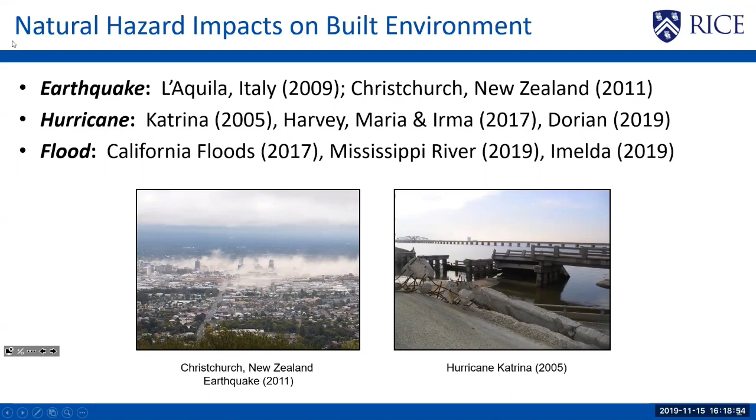I think it goes without saying that we can appreciate the potential impacts of a broad range of different natural hazards on our built environment, whether it be historic or recent earthquake events, hurricanes, or flooding events. This really serves to prompt and promote better understanding of not only the physical performance of individual infrastructures or networks of infrastructure systems, but also better exploring and modeling some of those cascading impacts on our communities.

I pulled a couple of different sources that I think did a nice job of helping to underscore some of the impacts of these hazard events on our built environment from different lenses. The first plot is some of the widely published data from NOAA, looking from about the time I was born until present day in terms of the number of billion-dollar disaster events. We note the increasing number of these events over those several decades, as well as some of the contributing hazards. This is looking at a US nationwide perspective.

I like some of the work from Pesaresi and colleagues that take a deeper look at trying to uncover some of the potential contributing factors with respect to looking globally at the exposure of either populations or area of development of our built environment. We see that continual uptick in some of those contributing worldwide threats with respect to earthquakes, flooding, or hurricane events, but also underscoring that with population growth and urbanization, we continue to be plagued with this challenge of mitigating the effects of natural hazards.

We'll dive down a little bit more deeply to look at one specific piece of that built environment today, which is transportation infrastructure. A lot of my examples today will be from bridge and roadway networks, where we spent particular effort trying to understand the individual components of these infrastructure systems. We'll also look today a little bit more broadly at how they translate into that system level performance or interaction with the community. I pull an example here because it hits close to home for me.

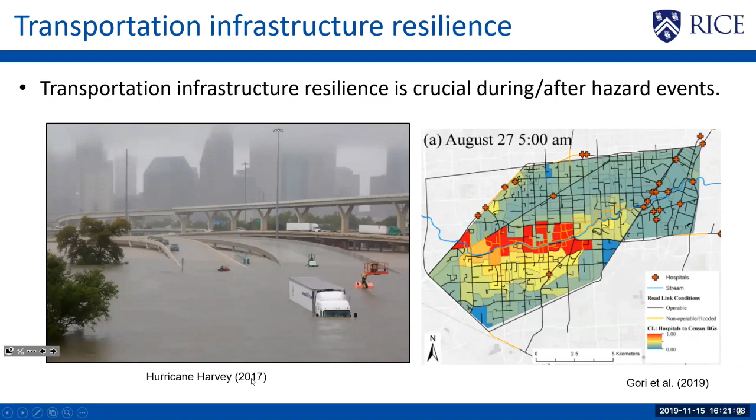These are images and maps from Hurricane Harvey that occurred in 2017. How many of you saw plenty of media reports about Hurricane Harvey out in the audience? Anyone live in or visit Houston during that time period in Texas? Some former Houston residents I know in the audience. This essentially was more or less in my backyard, so it always hits close to home when we're reminded of the potential effects that perhaps our work can have in trying to mitigate these events that affect our local communities as well.

We were reminded from this event when we're looking at perhaps roadway or bridge inundation or washout of structures of the short-term implications that can have on impairing emergency response operations, but also the long-term effects that can have in terms of repair and recovery of other systems or community functions.

We were also reminded from some of the work that we did following Hurricane Harvey of the inequitable impacts that hazards may have on different residents of our communities. The map on the right was some of our study hindcasting that Hurricane Harvey event, its impact on transportation infrastructure with respect to access to critical facilities like hospitals, but also looking at that intersection with different socially vulnerable populations or socio-demographic groups, where we saw very high correlation between loss of transportation access to emergency services and indicators of social vulnerability.

With that, we'll take a look at diving a bit deeper into better understanding and modeling transportation infrastructure performance and resilience following these types of hazard events. We'll touch briefly on some of the key input models to that framework, which has really been developed and evolving through a worldwide set of researchers. And I'll spend a bit more time looking at application examples, and we'll use those examples to point out recent advances and some continued challenges and opportunities before concluding today.

We're interested not only in that immediate post-event performance, but the time evolution as we seek to restore some metric of performance, whether it be load carrying capacity for a bridge or traffic throughput through a highway transportation network.

We see these notions of looking at pre-event planning, at absorbing these events, these punctuated hazards, and looking at that recovery timeline or adaptation over the infrastructure time horizon. So with that, I'll pose a very generic multi-hazard resilience framework.

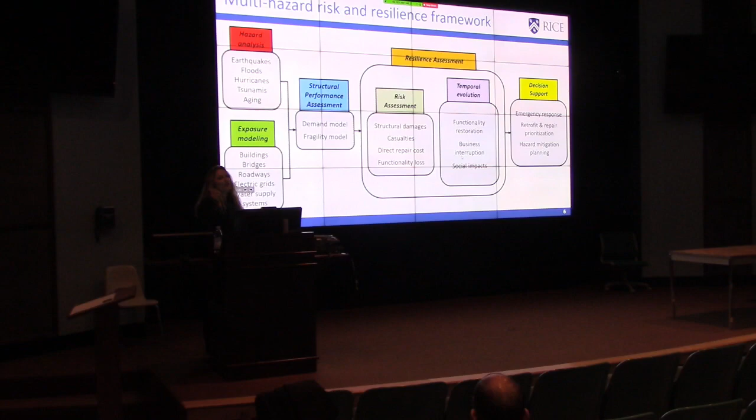Of course, key to this notion is that we have to have a healthy understanding of the hazard potential, whether it be earthquakes, hurricanes, floods, and so forth. We need to look at that exposure, like the early examples I showed of that worldwide exposure to populations or developed areas.

To be able to actually assess our infrastructure or structural performance, we need an adequate characterization of the spatial distribution of those structures, of their design details or other features, so that we can assess their behavior or response under these extreme event loads and their likelihood for entering some level of damage that we can correlate to metrics of performance, whether it be functionality or other cascading consequences like casualties or repair.

Keeping in mind our notion of resilience, we're interested not only in that immediate aftermath of the event, but looking at the temporal evolution of various metrics. These could be functionality of the individual system, but we're also seeing increasing notions of looking at the intersection between our built environment and other social and economic systems when quantifying community resilience.

A lot of what I'll be talking about today are some of the input models to this framework or examples of their integration, more from the analysis, modeling, and quantification perspective, but keeping in mind that our ultimate goal is ideally to support decision-making at various points in time in this resilience timeline.

It may be with respect to pre-event planning in terms of prioritizing resources for upgrade or investment of these systems. It may be in the immediate aftermath of these events, looking at emergency response and where we deploy crews, or maybe more of a long-term planning horizon that we're trying to affect in terms of hazard mitigation.

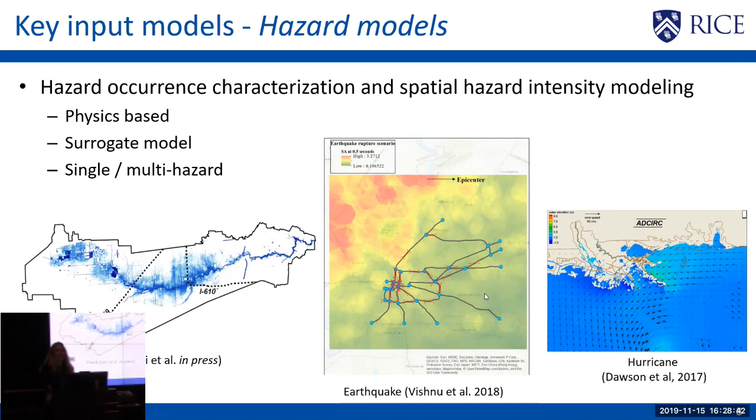And increasingly work that's looking not only at individual hazards, but multi-hazards from different perspectives, whether it be those cascading events like tsunami following earthquake, repeat events like repeated earthquake events or main shock aftershock simulations, or this idea of concurrent or correlated hazards, with that hurricane event being a prime example of the multi-hazard wind, surge, and wave event. Each of these pose challenges for us in terms of modeling and simulation, particularly in a probabilistic resilience quantification.

With respect to exposure modeling, I'll just point to some of the challenges and opportunities that I see here. A lot of the work that I'll show you today is looking at transportation infrastructure, and we do have some luxury of publicly available databases for some of these systems. But as we look at alternative systems, we're increasingly posed with challenges of understanding even the characteristics of those systems at a regional scale.

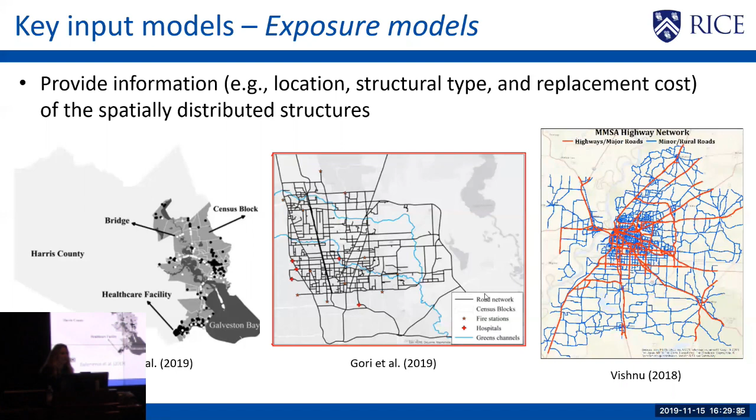We see increasing efforts at looking at proxies for different performance indicators or characteristics of the structure, and increasing efforts to be innovative in terms of how we define our inventory, whether it be leveraging AI from aerial imagery or boots on the ground data collection and synthesis.

In terms of characterizing the physical vulnerability of these infrastructure systems, here's where my group spends a large portion of their effort, is in terms of some of the fragility modeling of structural systems. The idea here is that we're characterizing the likelihood of damage to these structures or exceeding different limit states given some intensity measure of the hazard.

Or increasingly shifting towards not only the intensity measure of the hazard event, but also a set of characteristics that describe and define the structural system.

In this transition that Professor Bocchini mentioned, from structure-specific fragility modeling to portfolio level or class fragility modeling, we have a lot of decisions and compromises to make in terms of introducing additional sources of uncertainty into our fragility modeling and having adequate characterization of those systems.

We've seen increasing trends in recent years, including some of our work, to introduce the notion of parameterized fragility functions that help us transition from univariate fragility models, where damage is conditioned solely on intensity measure for a class of structures or an individual structure, to a compromise: a parameterized fragility model for a class.

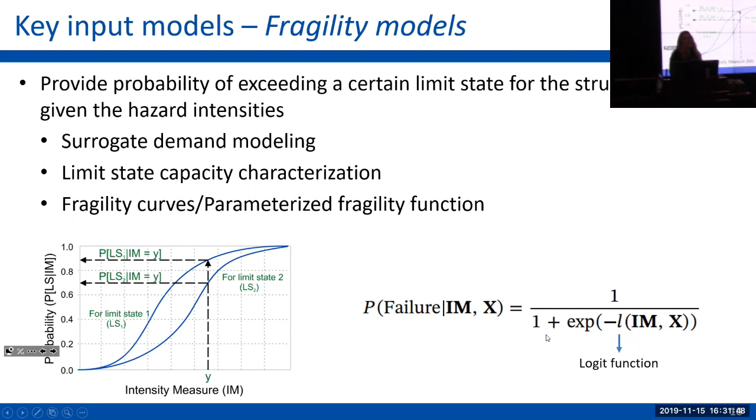Some advantages to this type of strategy would be that on a regional scale, we can have advantages in computational efficiency without deriving unique models for each individual structure, but still have the advantage of considering structure-specific details from our inventory, where we can propagate those uncertainties or introduce those design parameters from exposure information data.

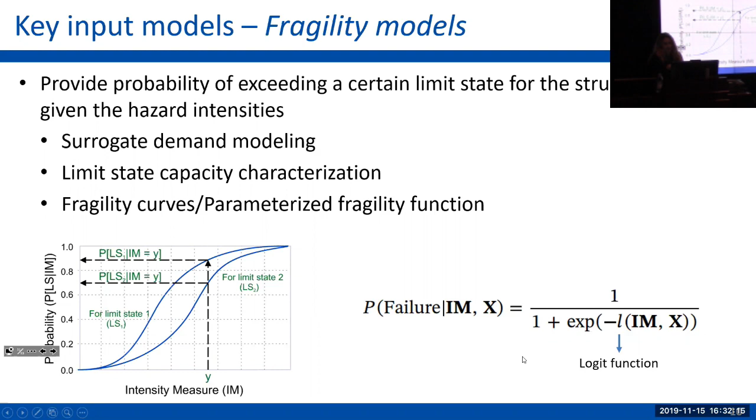I showed just one example form of that, derived based on a logistic regression, which is the form you'll see in a lot of the examples I show moving forward, but this certainly is not the only option for those parameterized models.

Very briefly, I wanted to highlight some of the range of different structural systems pertinent when we're looking at resilience of transportation infrastructure, with some former and recent advances here. The first one, shown top left, is a structural system that's received relatively limited attention in fragility modeling, especially at the class or portfolio scale.

If we wanted to look at resilience of railway networks, formerly we had very little information on the fragility of these structural systems. In many cases, we relied on their highway bridge counterparts as a proxy for railway bridge fragility. But that would have been an overestimation of the vulnerability of these systems if we don't consider the unique design details with rail-track interaction, for example.

This really serves to underscore, for those of you in the audience, that we still lack a lot of input models to this resilience assessment framework as we look to apply it to different types of infrastructure systems.

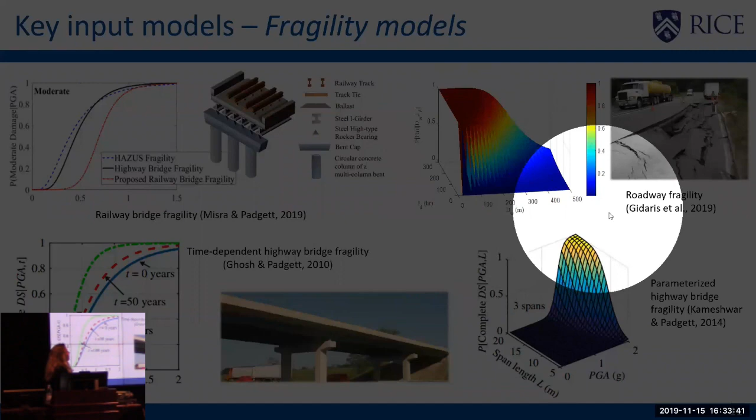On the right-hand side, an example of looking at another component of our transportation infrastructure with respect to roadway. We're looking at roadway under hurricane hazard loading, considering in this case a fragility surface where inundation duration is a key predictor of roadway washout, coupled with distance from the shoreline.

This is part of some of our ongoing collaborative work with researchers from the University of South Alabama, primarily informed by empirical damage data from Hurricane Ike.

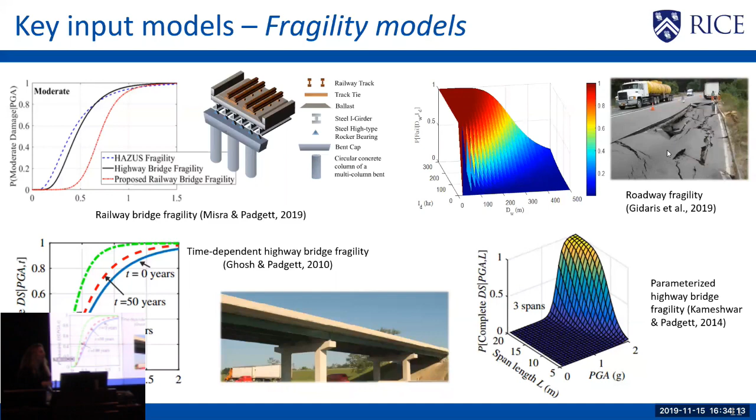On the bottom left, I'm pointing to some work we conducted about a decade ago, but I think this notion has really gained momentum and interest: looking at the joint intersection of different threats. Specifically, this example looks at effects of aging and deterioration of bridge infrastructure when assessing its performance under hazard loading, suggesting that we cannot simply look at that pristine structural condition when predicting its performance.

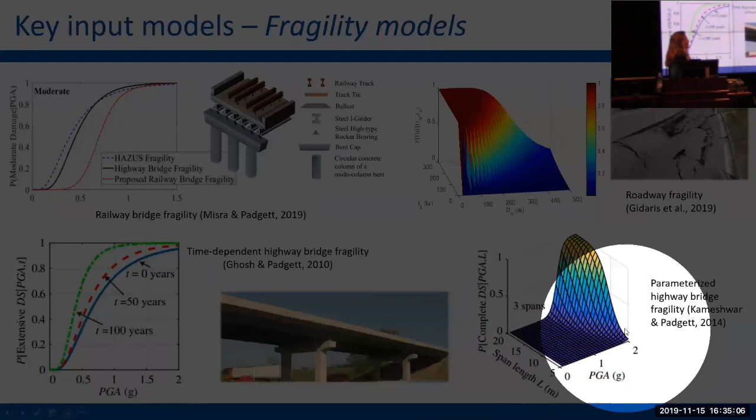Performance under hazards such as earthquakes. This is some work that Jay Ghosh did as part of his PhD work, which led to this notion of time-dependent fragility models for various structural systems.

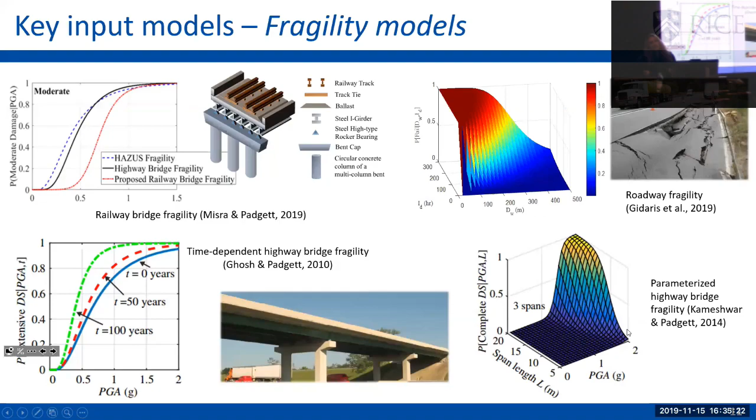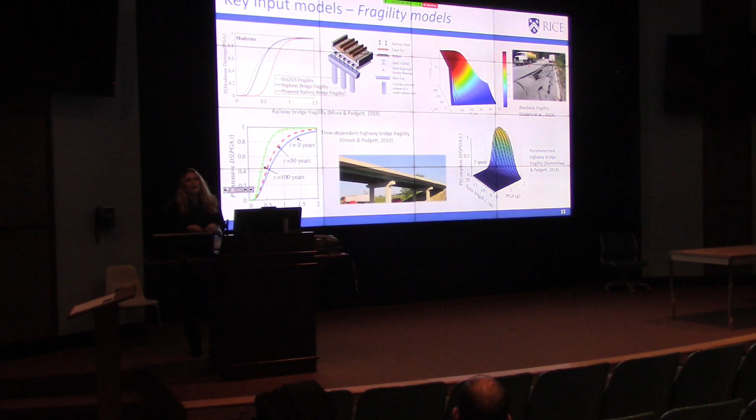And then finally, at the right, underscoring some of the parameterized fragility models for highway bridges that allow us the opportunity for what-if scenarios, looking at different design details. For an individual structure, exploring influences such as changing reinforcement ratio can be useful in the design phase, or at the portfolio level, looking at influences such as span length or number of spans so we can target and pinpoint some of the more vulnerable structures within our infrastructure network.

Finally, I want to point to another key input model that I think is quite a challenging problem: modeling the restoration, either at the individual structural system level or considering how those map to and integrate with the network level restoration of functionality.

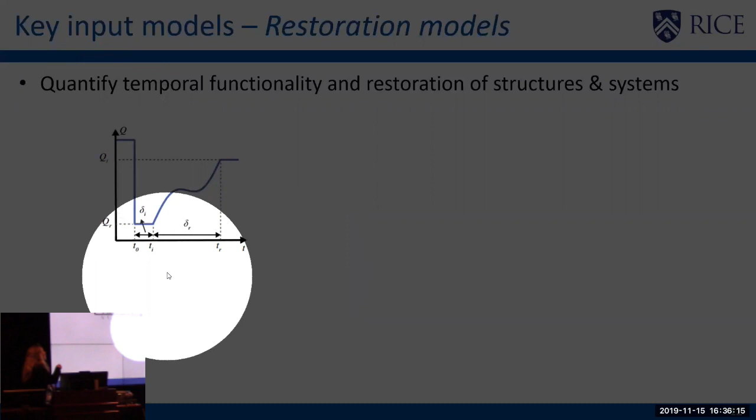So a fairly generic indication here that's been widely adopted by various researchers, including groups like Professor Bocchini's, to look at this idea of the time evolution of some metric of functionality Q over time, recognizing that we have some triggering hazard, some potential delay or time till initiation of recovery, and then that time evolution of restoration of functionality.

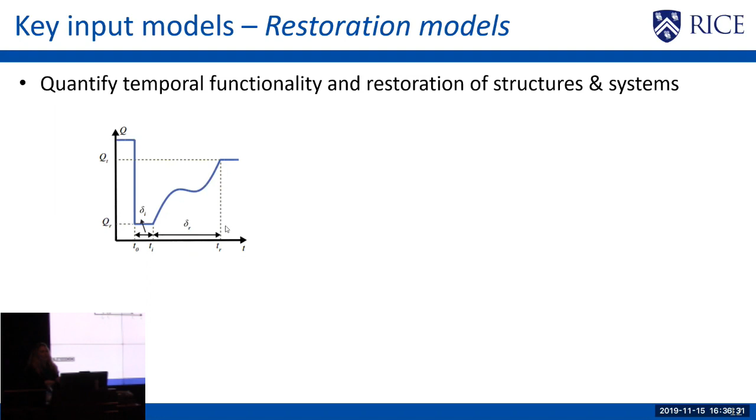Not a trivial thing to try to model from an objective perspective. I'll note that within the transportation infrastructure realm, there's been quite a bit of work that has attempted to look at this, especially for bridge infrastructure, looking at some early stepwise restoration functions just for the immediate aftermath of the event, to work that's looked at that full time evolution of recovery or explored different model forms that could be introduced to characterize that recovery.

A real challenge with developing these models is the need for data to either inform or train them. One approach we've taken is to leverage survey data of owners, inspectors, and contractors who would perform either the post-event inspection or model that restoration timeline, considering repair actions, and also collecting post-event damage and recovery information on time to repair.

This is one potential approach where we have looked at decision tree models informed by survey and empirical data, giving insights based on the combination of component damages to this system: the likelihood of closure to the bridge immediately after the earthquake, or imposing load, lane, or speed restrictions. This is particularly important if we want to link bridge infrastructure damage to transportation infrastructure performance, characterized in terms of metrics that tie to traffic flow or lane load and speed restrictions.

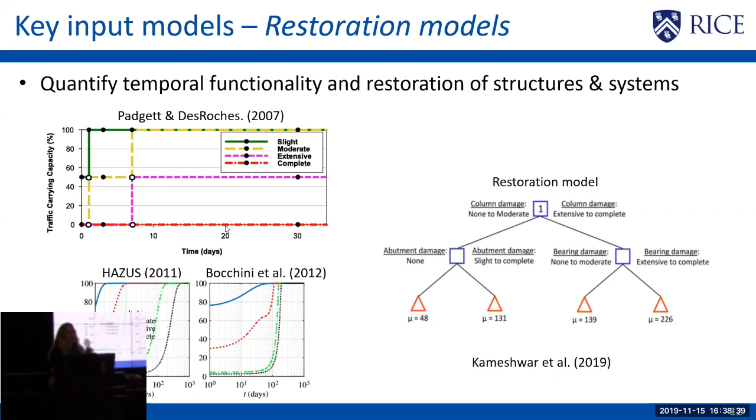An additional consideration is not only the immediate aftermath of the event, but looking at that repair timeline and evaluating the time to either fully open the structure or remove some of these restrictions. With that in mind, I want to move to a few application examples that highlight advances and challenges in this area.

The first example is an evaluation of resilience to seismic hazards for a transportation bridge and roadway system, where we look not only at classical metrics of resilience, but broaden that notion to other metrics of performance. We'll leverage a test bed in the greater Memphis area, which I refer to as MMSA, the Memphis Metropolitan Statistical Area, or zoom in to a specific Shelby County example in the region.

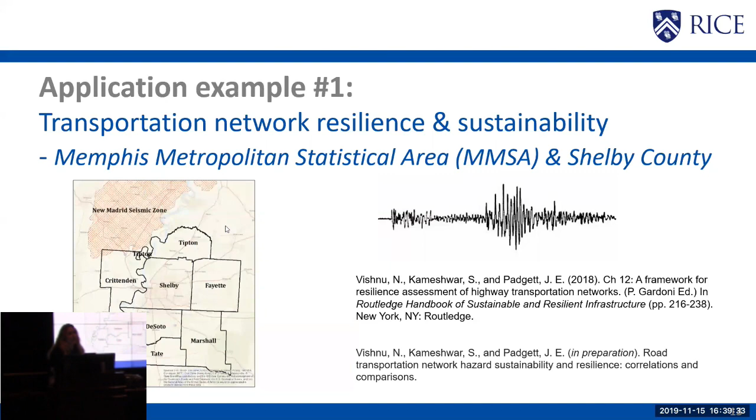This specific location is part of an ongoing test bed as part of the NIST Center of Excellence on Community Resilience Planning. Of course, one of our challenges is to first define that infrastructure system in terms of its exposure, the characteristics of the bridge and roadway system. I won't go into the details of all the data collection, but just an illustration of the type of network we're dealing with here.

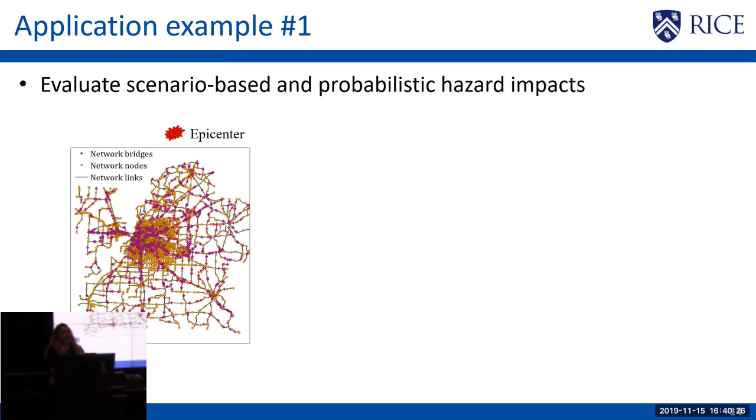We're looking at both scenario-based and probabilistic hazard analysis for this case study. I'll show you one example of a scenario earthquake event near the New Madrid seismic zone, where we're integrating some of those parameterized seismic bridge fragility models mentioned earlier, and also the decision tree-based restoration functions for looking at that time evolution of component restoration of functionality.

Here's one example where we compare pre-event transportation network performance in terms of traffic flow through the network, implying that we're coupling this with a flow-based analysis. From our perspective, we are not transportation engineers—we're using what I'll call state of practice user equilibrium traffic flow simulation through this network to look at things like the number of vehicles flowing through these links.

To inform this, we need information on key origins and destinations in our system, essentially where drivers tend to go. Integrating those input models from the fragility and restoration functions, we can better understand the post-event condition, not only immediately after the event—seen here with color-coded closed bridges marked by red X's, partially open structures with lane or load restrictions, or fully open structures—but also explore how that evolves over time, both at the component level and in how it affects transportation network performance with traffic flow through the system.

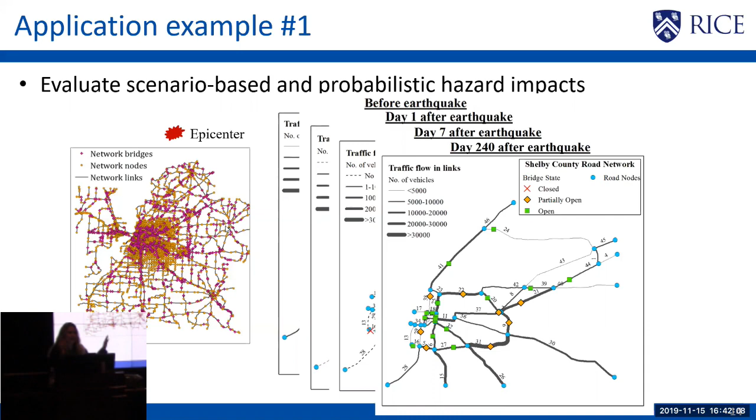In this example, by about 8 months after the event, although we still have some partially open structures, we have nearly resumed our initial traffic flow in the system. So that's one way of measuring the time evolution of performance of that system.

But I think this is really an ongoing discussion that we need to continue to have with respect to these types of resilience metrics, or ways that we may measure and communicate functionality of these systems. And it may be very different for different decision makers or stakeholders.

From the perspective of transportation infrastructure, we often look at things like connectivity between different locations, say from a household to a fire station, or metrics such as travel time or travel distance that are often tied to indirect consequences on the community. We can broaden that notion to not look in isolation at the transportation system, but its intersection with social or economic systems, looking at other metrics of performance over time.

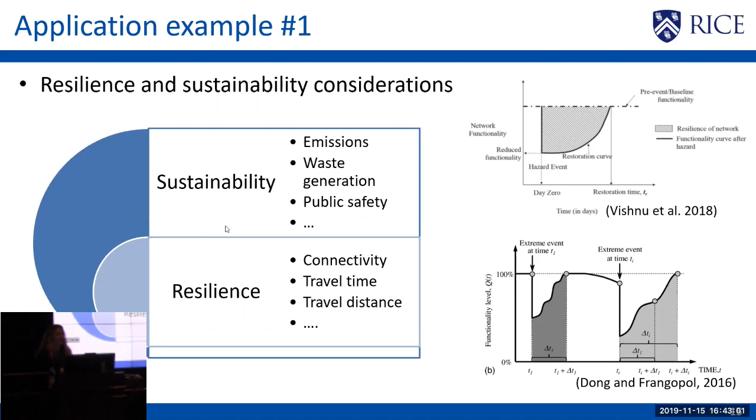I think this starts to have a lot of interplay with discussions surrounding sustainability of our systems, and perhaps looking at hazard performance through that lens of sustainability, where we measure things like the waste generated from damaging, repairing, rerouting within the system, or the emissions and embodied energy associated with those repair or rerouting actions. These may be other, perhaps broader resilience metrics that we consider through the sustainability lens.

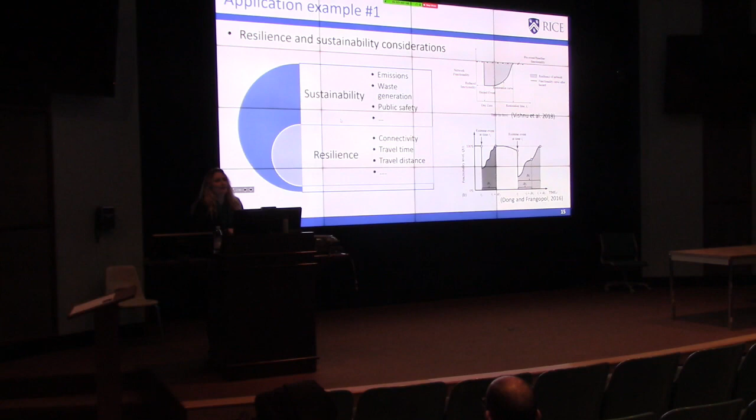There are also a lot of different suggestions in the literature with which we might quantify these individual metrics of time evolution, considering integration above or below the restoration timeline, and work like that from Frangopol's group here at Lehigh that suggested we need to be transitioning to looking towards life cycle measures of resilience with the potential for multiple or repeat hazard events. So all of these, I think, are worthy discussions as we continue this pursuit.

One thing that I want to put out there is perhaps the need to better offer guidelines on the resolution of some of these types of models when we're answering different questions or measuring different levels of performance. For example, with that same MMSA network, we looked at various measures of performance such as travel time, travel distance, emissions, or missed trips. As we look at different resolutions of our transportation network, it can have a very significant impact on the measurement.

Of these resilience metrics. I also think that points towards the fact that we should perhaps be more interested in relative comparisons of some of these measures at this stage, rather than some of those absolute estimations of either deterministic or probabilistic metrics of resilience.

Lastly, I want to point to some of the opportunities this can pose in terms of looking at, perhaps at a system level, identifying what are our dominant contributors to these measures. So if we're looking at emissions over the transportation network, which key vulnerable bridges, the damage of which structures, are contributing most to the emissions we see. This could be a way to help target pre-event investment in retrofit or upgrade, depending upon what your metric of interest may be. It doesn't have to be emissions.

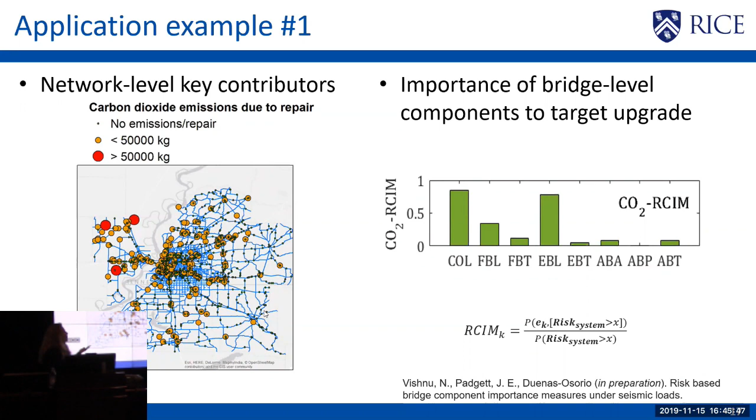The other way we can look at this may be at the structural system level. This is just an example of some work we've been doing in collaboration with my colleague at Rice, Leonardo Duenas-Osorio, looking at risk-based component importance measures, where we essentially identify which bridge components, whether it be the columns, the bearings, or the abutments, are responsible or tied to us exceeding various risk thresholds.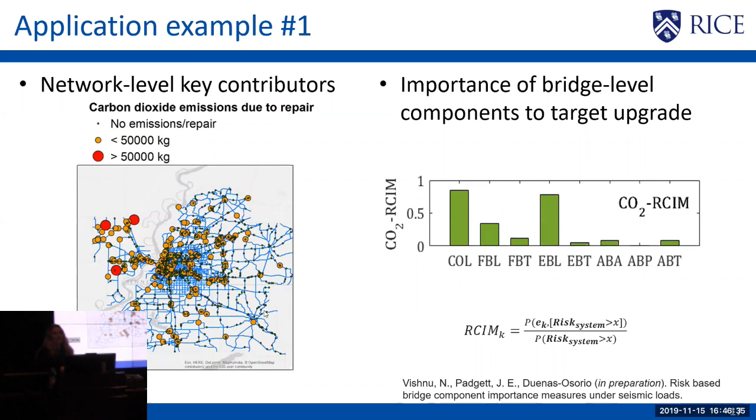This may be target risk thresholds with respect to cost, emissions, travel time, however you want to define that risk performance measure. But it helps us perhaps to have a transition from our traditional reliability-based component importance measures to looking more broadly at social, environmental, or economic implications of these structural systems.

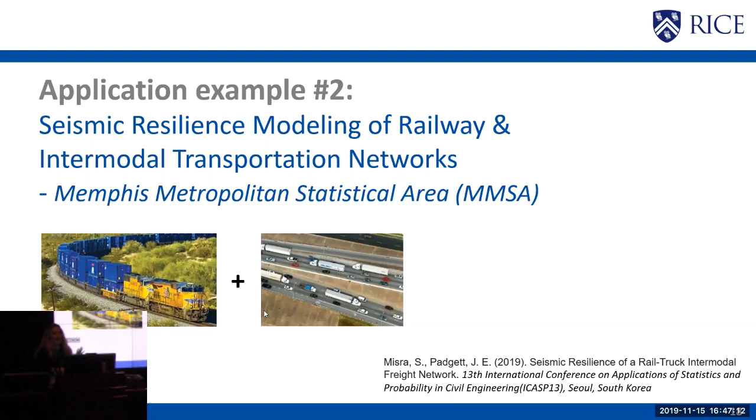With that, I want to transition to an application example that moves us beyond individual modes of transportation, like our bridge and highway network, that I think has received a little more attention in the resilience modeling community, to looking at railway systems and this idea of intermodal resilience of networks, where we consider the potential for transport of goods or freight across these different systems. We're again using that same MMSA testbed around the Memphis metropolitan area.

So some of the ongoing work of one of my students, Sushreyo Misra, is looking at defining a probabilistic resilience framework for rail and truck intermodal systems under seismic hazards, essentially considering the potential for freight flow across these two systems. There's been quite a bit of work from more of the operations and logistics perspective of looking at resilience of these intermodal systems, but we find that we're lacking a lot of the key input models in order to adequately assess the performance of either the individual or the combined systems.

I showed you the example of the railway bridge fragilities or some of those restoration functions that we're deriving not only for bridges, but also rails and roadways that inform this type of modeling.

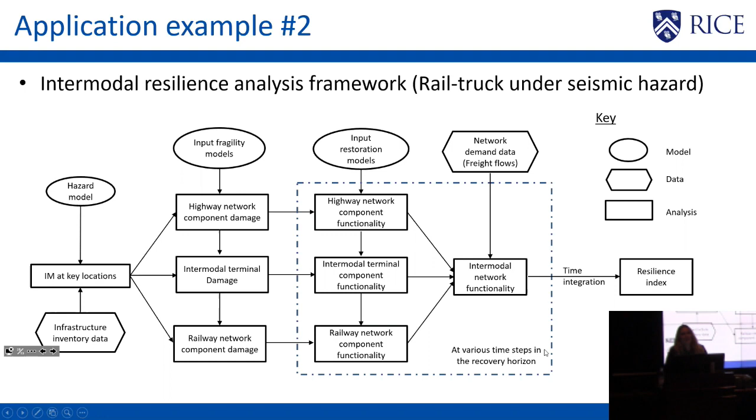Some of our ongoing work is looking at what I think is an interesting challenge in these intermodal networks, which is not only the railway network or the highway network alone, but where they come together for goods transfer. This is essentially a complex system in and of itself with respect to the terminals. We have cranes, we have the potential for warehouses, we have other systems such as fuel that are important for that freight flow transport. Each of those have their own constituent structural systems and functionality that are required for informing the intermodal network functionality.

I'll show just a few examples of that MMSA system in terms of the range of different metrics we may be interested in. It could be things like cost to the shipper—perhaps one of the dominant metrics important for determining if the shipment will be taken. We could look at indirect effects such as cost to the environment or the potential for accidents, or freight flow value that's disrupted. This is perhaps one of the most direct links with some of our colleagues looking at economic impacts at a regional or nationwide scale.

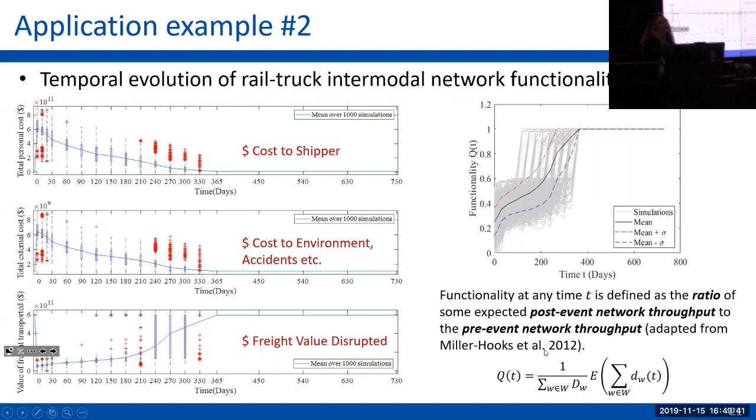An illustration on the right is showing an adaptation of a functionality metric that was proposed by Miller Hooks, where we're essentially adapting that to look at the time evolution of post-event to pre-event throughput in that intermodal network, which is shown in the figure at the top.

So what are some of the implications of these types of models? One thing it's pushed forward for us is the importance of looking not only at multi-resolution but multi-scale analysis, especially when we're talking about things such as freight flow, where we don't have these perfect boundary conditions around, say, Shelby County or the MMSA case study network, but there is the potential for local damage to affect that nationwide freight flow. That's led us to look at high resolution models with all of those individual components like the intermodal stations in our local region, but coarser models across the nation for flow of goods that could be rerouted around our affected regions.

It's also allowed us to have better opportunity for coupling with some of our colleagues that are looking at these regional or nationwide CGE models of economic impacts.

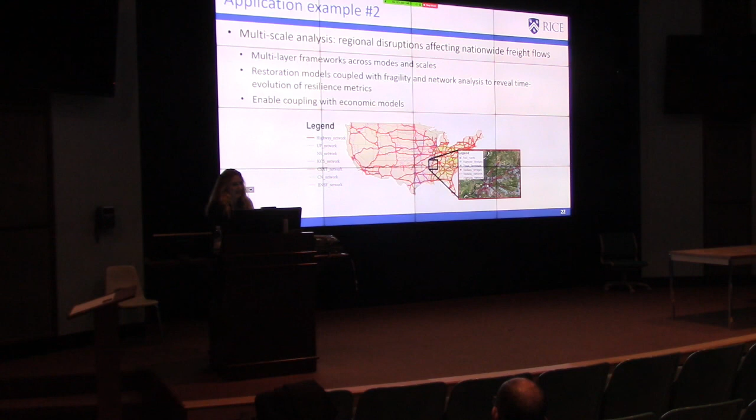With that, I want to take a bit of a shift down the coast. We've been looking up in earthquake country in the central and southeastern US, and I want to use a couple of final examples that are closer to home for me. We're shifting towards the Texas coast.

So now in this multi-hazard context, we're considering the potential for hurricane events and their impacts on our transportation infrastructure. But in this example, I want to shift to looking at not only the impacts of, say, bridge and roadway damage on the transportation network performance, but how we might link that with other systems such as petrochemical facilities or refineries that have their own models to characterize their performance.

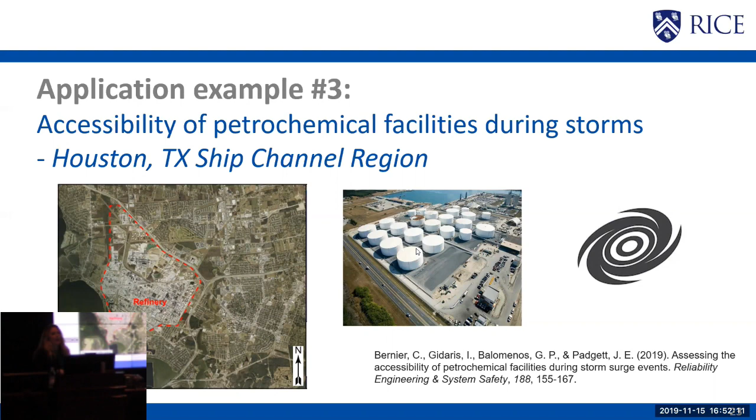So we'll be looking at this idea of performance of components within a refinery along a coastal region, in particular the potential for damage and spill risk to above ground storage tanks in these refineries. One of the key questions we're trying to answer is, can we actually access these high spill potential locations quickly during or after a storm? And also, what are the broader implications perhaps for things like human resourcing or staffing? Can workers get back to resume business operations or for intervention activities?

Generally, you see our integrated framework and some of the key inputs. We spent quite a bit of effort developing some of these tank vulnerability models in recent years, and we'll be integrating some of the bridge fragility models for looking at unseating potential from hurricane coupled surge and wave action. In these examples, we're using scenario storm simulations that I'll be showing you, with the potential to extend that to more of a fully probabilistic hazard analysis.

Some of our key questions, again, would be looking at whether we can reach these high spill risk locations, because not only of the potential for bridge damage, like the unseating case, but that time evolution of inundation of bridge and roadway that affects short-term functionality as well.

In terms of some of those input models, we spent a lot of effort developing some of the exposure or inventory data, processing aerial imagery, as well as relying on permit information, publicly available databases, reverse engineering the design of some of these structures. So it doesn't perhaps always get a lot of appreciation, but there's a lot of effort that goes into building these types of case studies.

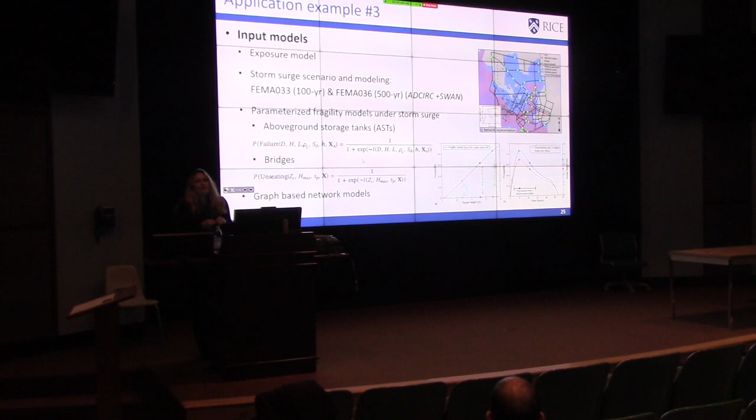The two different scenario storm events we're considering are based on work done by the U.S. Army Corps of Engineers with coupled ADCIRC and SWAN models, essentially high fidelity simulations of surge and wave potential. We're integrating parameterized fragility models that predict the potential for tank damage, including failure from uplift, shifting, or overturning of these tanks that may lead to spillage of hazardous materials like crude oil.

From the perspective of bridge vulnerability modeling, we're considering parameterized fragilities where unseating is predicted based on characteristics such as maximum wave height or relative surge elevation.

The illustrations on the right underscore the time series we're considering. I'm focused on a relatively short time horizon in this example, looking at the full time evolution of the storm passage - not only the surge time history, but also the time evolution of failure probability of those tanks, which may lead to spill risk during the storm event.

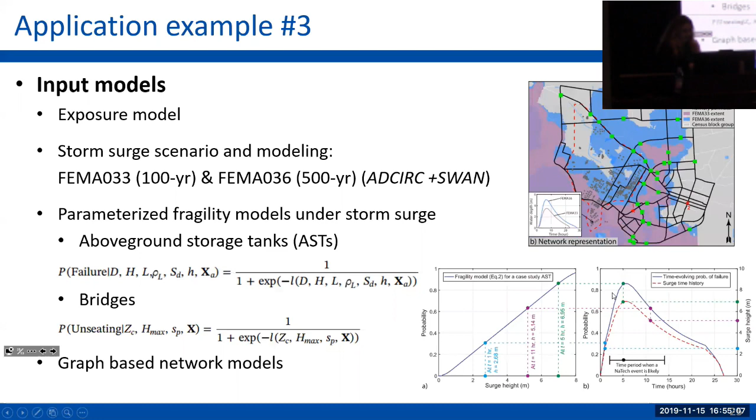That's where we want to focus on whether we can access these high spill risk locations, considering we may have the potential for removing nodes or links in our transportation network because either the bridge is unseated, the road is washed out, or we have inundation of those assets. We'll look at different metrics such as connectivity loss, travel time, or travel distance.

We use that to look at things such as increased travel time from emergency services to the high spill risk locations, or the time evolution of census block access back to the refineries.

This can have key implications from an owner or operator perspective. Often there are definitions requiring those involved in resuming business continuity or emergency response to live within a certain radius of the facility. But that may not be the best approach from a risk-based perspective, looking at the likelihood of actually being able to reach the facility from home. You may be very close to the facility but have very low potential of actually getting back to help with cleanup or resuming operations.

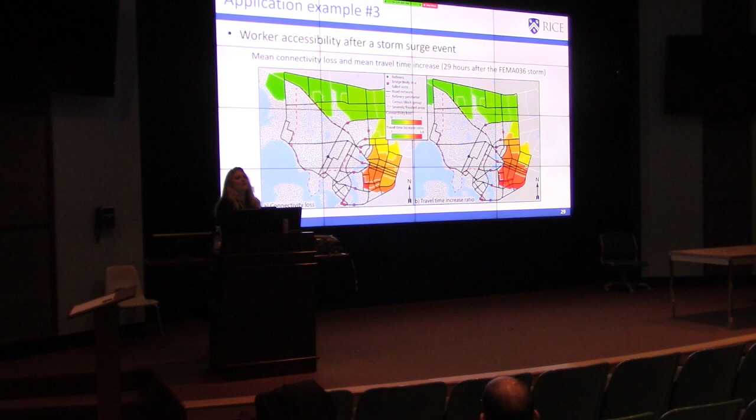So that's one other perspective on how transportation infrastructure resilience can inform various stakeholder decisions.

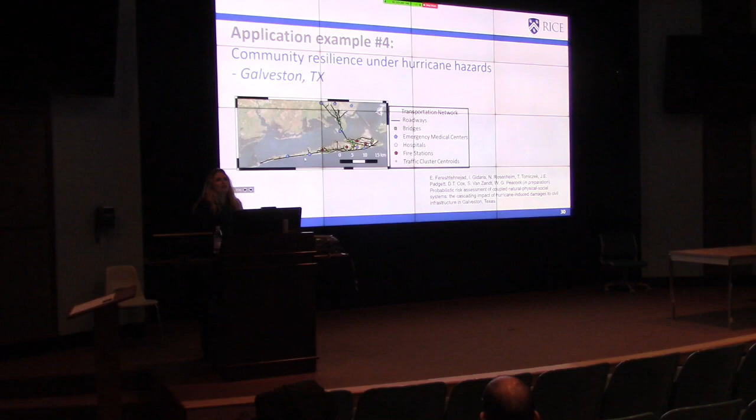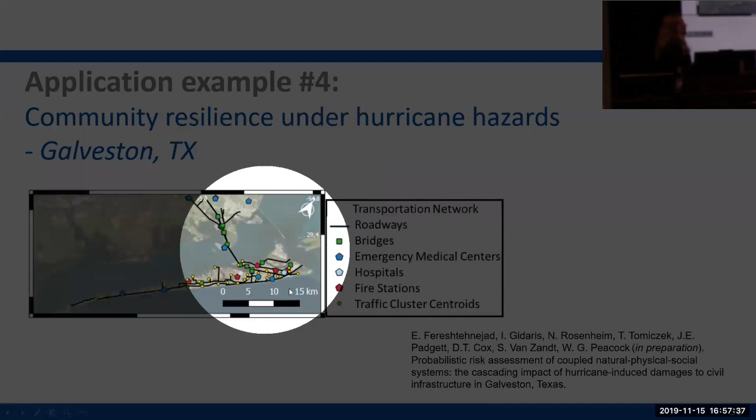I want to leave you with this last application example, integrating transportation resilience models into a broader assessment of community resilience under hurricane hazards. This is part of a large collaborative effort with colleagues from Texas A&M social sciences, Oregon State University, and the U.S. Naval Academy. In this example, we're looking not only at bridge and transportation infrastructure, but the potential for building damage from these multi-hazard surge, wind, and wave events.

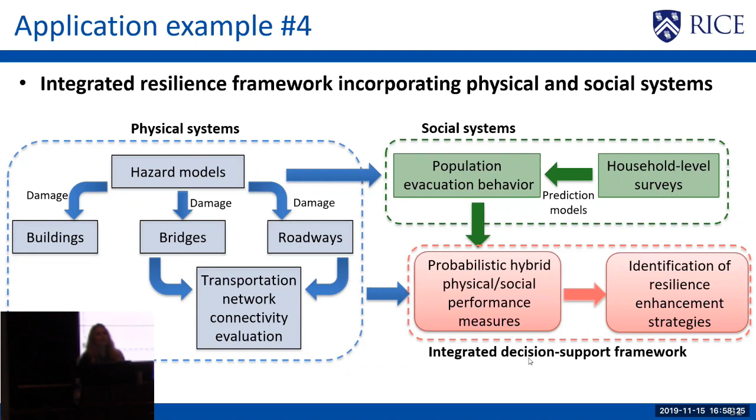We're coupling that with social systems models characterizing household-level sociodemographic information for the community, using it to inform models such as the likelihood of evacuating prior to a storm event. We use this to compute what we refer to as hybrid metrics of resilience, implying that we require this coupling between social and physical systems to even evaluate some of these metrics to inform decision making.

In terms of hazard modeling for this case study, we're transitioning from the scenario storm events I showed previously to the potential for fully probabilistic hazard simulation. We're achieving that by leveraging surrogate models of storm intensity measures using Kriging surrogate models. This follows generally the approach proposed by Taflanidis and colleagues, but extends it to look at other metrics such as inundation duration, which we find is a key predictor of things like roadway washout, as well as joint surge and wave intensity measures at the site.

Key predictors of this model include the angle of approach, landfall location, or radius to maximum winds. The advantage is we can very efficiently approximate these intensity measures and afford hundreds or thousands of realizations of the storm at the site of our building, bridge, or roadway infrastructure.

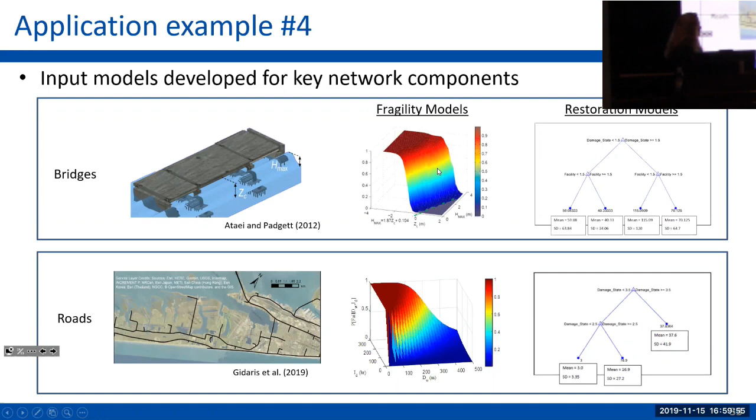These are some of those hurricane fragility models that I mentioned earlier, where we're predicting unseating potential given relative surge and maximum wave height. And then again, looking at the potential time evolution of restoration of functionality of these structures, as well as roadway washout based on some of those recent empirical roadway fragilities.

In this example, we're moving beyond some of our simplifications from the earlier studies and considering that we perhaps don't have perfect availability to crews and resources to conduct repairs of these structures. So now we're looking at constraints on crews and how we deploy them. We may have optimistic assumptions with respect to prioritizing crews based on their importance in the transportation infrastructure, or we may look at a system where we're lacking that knowledge from an objective perspective.

So this is just one example of looking at operability in terms of the fractions of different origins and destinations that we can reach, but considering the fact that we have constraints on crew availability, with the more optimistic assumption that at least those resources are deployed based on priority in the transportation network.

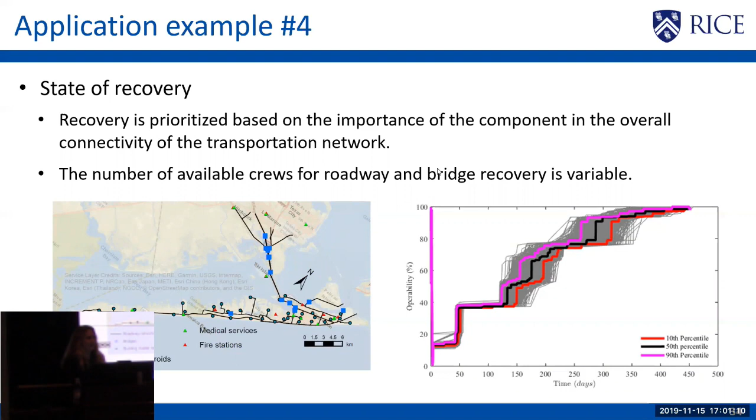With that, we can look at measures such as connectivity between various households to inland off of Galveston Island, or look at things like access to fire stations or medical centers.

We have the potential for looking at this now at the household level as well, and integrate things like the potential damage to the residential structure, as well as the access to that structure, and whether we are likely to have someone still inside, a non-evacuee.

This is what we're referring to as hot households, which is essentially a worst case: you're in a vulnerable structure that's likely to be damaged, you haven't evacuated, and you can't be reached by fire or emergency services. This could be a great way to target either communication strategies, support for evacuation, or where we may invest in pre-event risk mitigation activities.

Again, looking at that from both the scenario basis or, thanks to the efficiency of those surrogate models, looking at annual probabilities of exceeding these different measures.

So finally, I want to note a few challenges and opportunities that still remain, in addition to the ones that we discussed throughout the talk today.

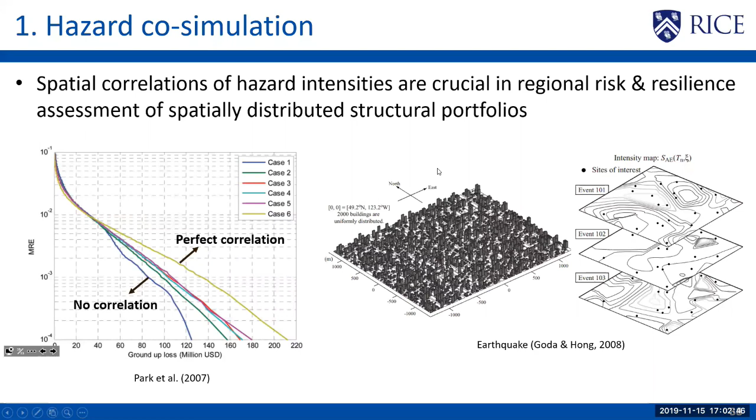One is with respect to hazard simulation, in particular respecting some of the correlation structures between these various intensity measures across our spatially distributed infrastructure. This is a particularly increasing challenge when we start to look at more advanced intensity measures that are excellent predictors of structural performance, but for which we don't have adequate models to characterize that covariance matrix for, say, realizing random fields of these hazards.

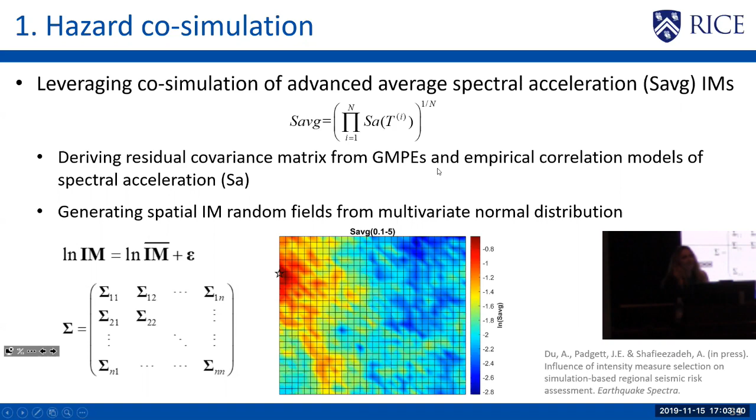It also becomes increasingly challenging when we look at tailoring individual intensity measures to each structure across our spatially distributed system. We've been doing some work leveraging a spectral averaging intensity measure that's been shown repeatedly to be a fairly good predictor of structural response, but we lack an adequate co-simulation method for these intensity measures. There's plenty of work left to do in that area, and I know of some great work ongoing here at Lehigh.

Also, when we're looking at these various complex systems exposed to multiple hazards, we increasingly face the challenge that, one, we have many structures we still have yet to adequately characterize in terms of their performance under multi-hazard loading conditions, and two, that we may have multiple response quantities of interest to predict. For example, in the bridge we looked at, we're interested in column response, bearing response, and abutment response, all important for characterizing failure modes of these structures.

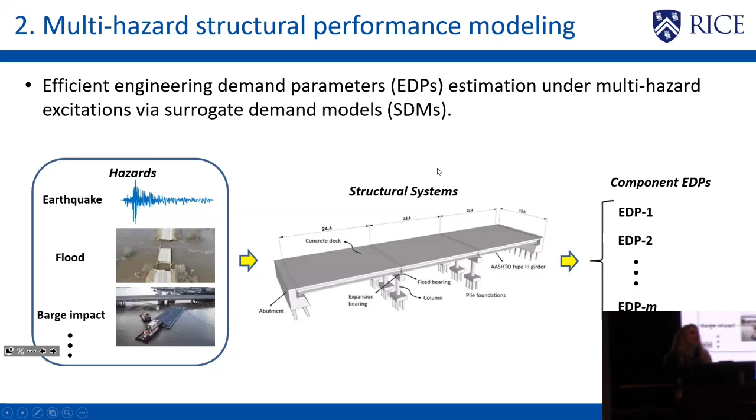We see a lot of effort tending towards exploring different types of surrogate models so that we can do this efficiently, without always having to rely on high fidelity simulations, for example with fluid-structure interaction for these coastal structures.

But I do think there are still questions in this area, particularly around complex structures with multiple important predictors of response, where traditional approaches have been to develop individual surrogates for the response of each component, like the columns, bearings, and abutments. An alternative may be to train an individual model, what we're referring to as a multivariate surrogate demand model, so that we can adequately characterize the response of multiple important predictors of damage, as well as preserve some of their correlation structures through what we're referring to as this trend and error covariance model.

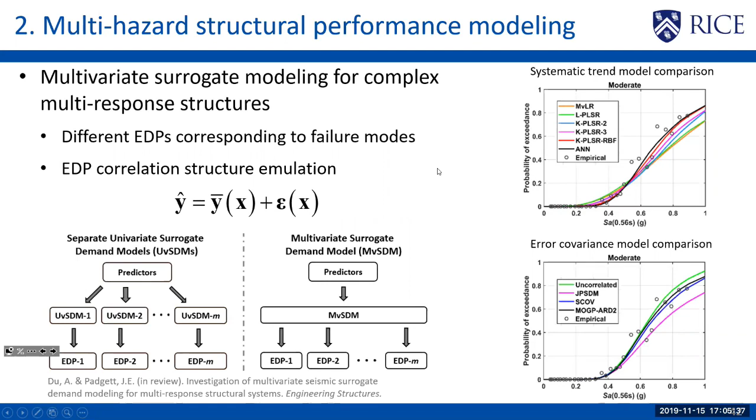And then lastly, I think we have a great opportunity to transition towards what I would refer to as a notion of smart resilience. This involves looking at how we can increasingly leverage diverse data sources for informing some of our models or our decision actions throughout this resilience timeline.

I showed just an example of some of the different data sources that we're looking at leveraging for the flood and transportation infrastructure problem, whether it be things like camera data or authoritative data from inspectors, among other types of crowdsourcing data.

Looking at, for example, improved situational awareness in the immediate aftermath of the event, where we look to fuse data, for example, from radar rainfall with physics-based simulations that some of our colleagues are conducting, with looking at transportation infrastructure performance and network accessibility studies.

This particular example offers a model that we've been developing for real-time flood alert and access to critical facilities during floods that essentially could deliver this information to the public or key stakeholders.

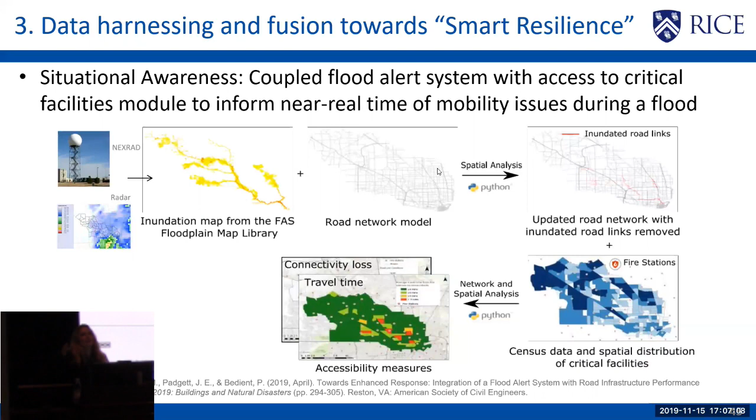But I think there are lots of opportunities to infuse different types of data sources, for example, looking at dynamic Bayesian networks for incorporating and updating this time-evolving process during the flood event.

So with that, I'll leave with a couple of key messages. I think we have what's generally been accepted as an approach for modeling resilience to these systems, but a lot of

the key meat and interesting challenges are in the details there for how we achieve that integration, and how we achieve accurate and efficient models for those types of simulations.

Some opportunities, for example, with respect to surrogate modeling, looking at uncertainty quantification and propagation, and looking at how we can actually inform practical decision making for improving resilience of these systems,

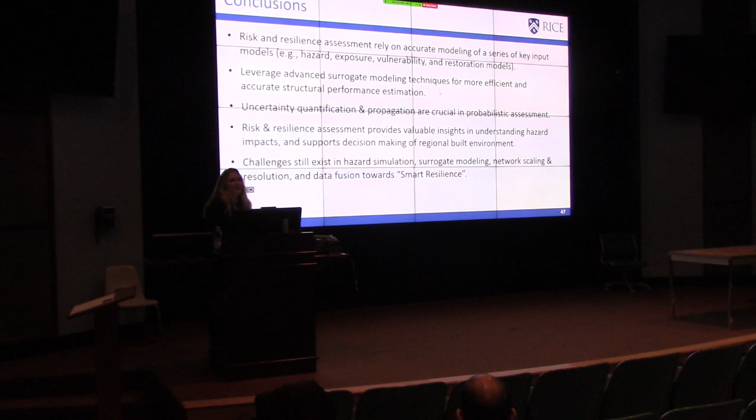So I want to acknowledge some of the funding sources for the work that I've drawn on, especially for the different application examples, in particular from NSF and from the NIST Center of Excellence.

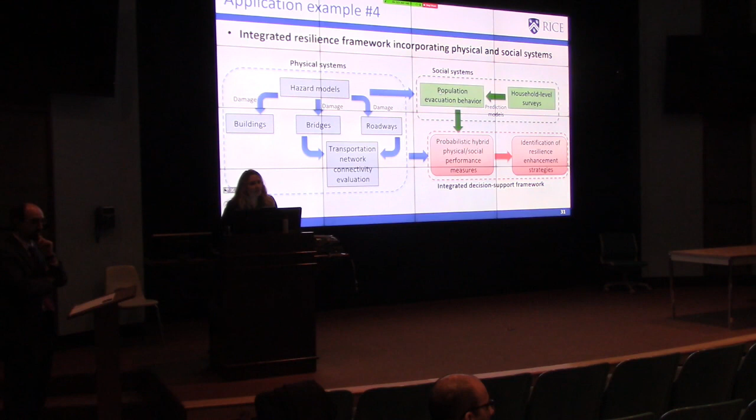Yeah, I do think this is still a question that requires more attention, but I'll give you some of my initial insights based on the studies that we have done.

I think it very much depends on the time point where you're concerned about measuring performance. If it's in the immediate aftermath of the event and we're looking at damage prediction, from some of the work that we have done and others in the literature, some of the uncertainty and hazard characterization across the region may be dominating our uncertainty in performance.

But when we're going to these longer time horizon regional simulations of resilience, then I think one of our largest sources of uncertainty is stemming from some of those functionality recovery models for the components of those transportation infrastructure systems. But that is, I will say at this case, still anecdotal based on case study exploration. I think we need a more systematic evaluation of that.

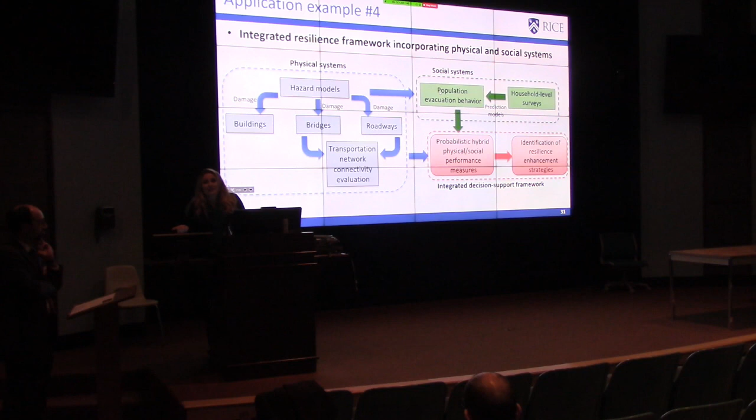For things like connectivity, that's not as central, but if you're looking at metrics such as travel time and considering congestion, then that's a really important factor. And I think it requires us doing much more coupling with other systems as well as social systems modeling.

So the key would be, for example, maybe your business is closed, maybe your child's school has collapsed and so no one's going to school and you don't have those same origin destinations that you would have pre-event. All of the comparisons that I have assume equal pre and post-event OD matrix.

And I think that is a very fair comment that requires further work. I've seen some recent interesting studies, especially looking at things such as power and water, that are looking at if we look at things like not only evacuation, but longer term population dislocation, then we can leverage that data for informing our demand on infrastructure systems. And we've yet to do that in the transportation applications here.

Yeah, I think that is a very fair question, and I'm sort of going to punt on that in the sense that I personally don't anticipate that in our work we're going to be developing new time evolving or non-stationary hazard models of the occurrence or intensity and frequency of these events.

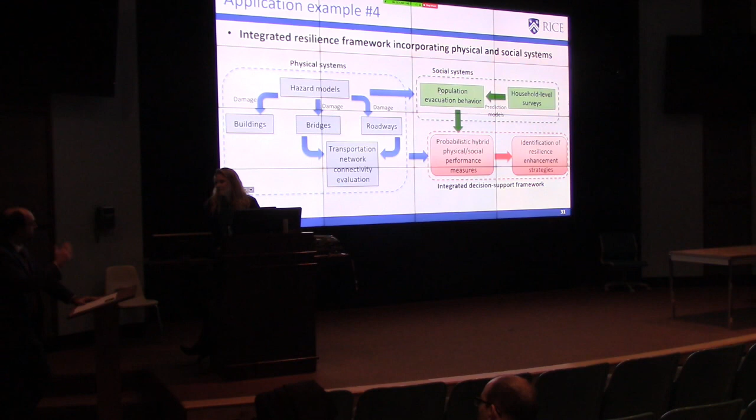I have a question about surrogate models. You presented fragilities as a surrogate model for the structural performance. You mentioned the kriging models for hazards as a surrogate for hazards. How about recovery? Do you have any idea for good surrogate models for recovery?

Yeah, we have been toying with that at this stage, but I wouldn't say that we have any solid results to present. And the biggest challenge that I'm seeing there, and it kind of goes back to a discussion we had earlier, is adequate availability of data to train some of these models.

I think it's leaving us with some more simplified notions of basic regression models or some of the decision trees that I showed without being able to exploit all of the advances of some of the modern, say, machine learning techniques.

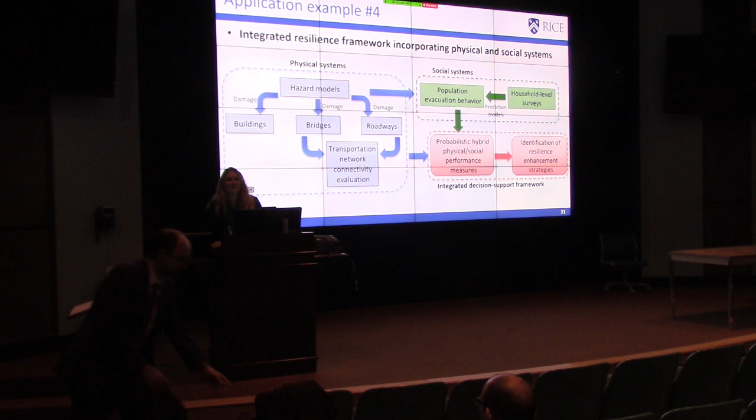So perhaps as we shift towards that smart resilience notion that I mentioned, where we are leveraging streaming data sources, and we could use something like camera data to actually monitor that repair and recovery timeline of a structure, then we may be able to build up large data sets for that type of training.